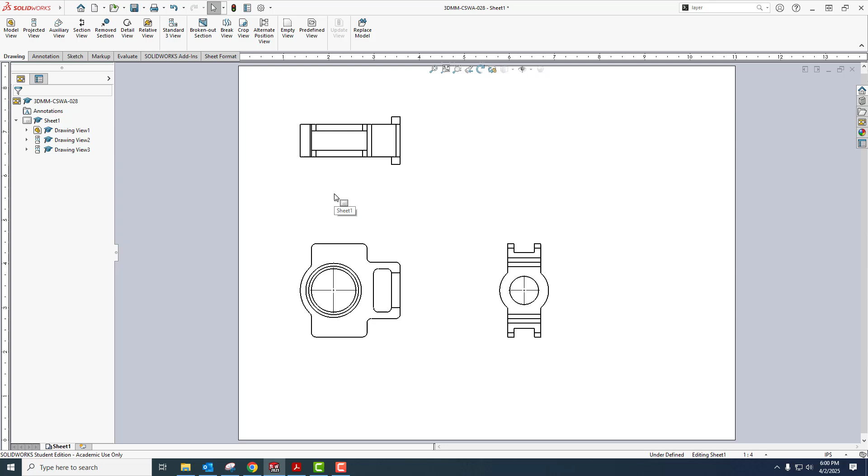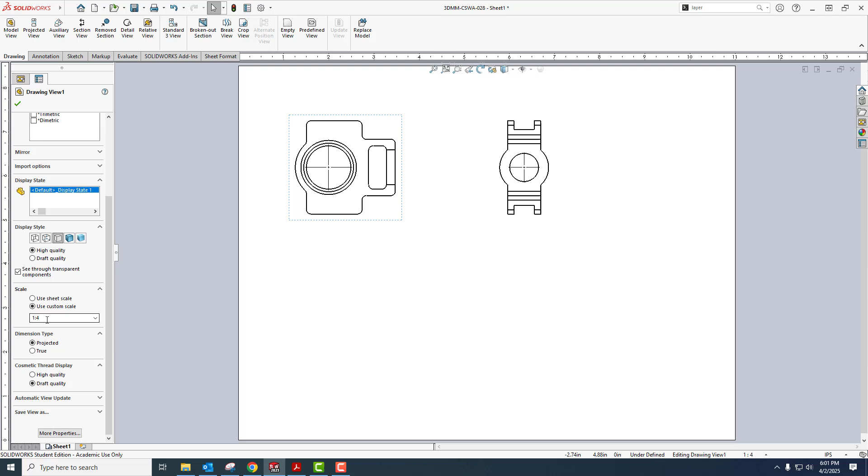So now I'm going to go under the Drawing tab, go to the Standard 3 view, click into Browse to where I have the -28 part located, and I'll say Open. All right, so now what I want to do is I want to delete this view. So I'm going to do that. And I'm going to move these two views up. And I'm going to set the scale of the drawing. So instead of using the sheet scale, I'm going to use custom scale. And I'm just going to type in 1:3 and hit Enter.

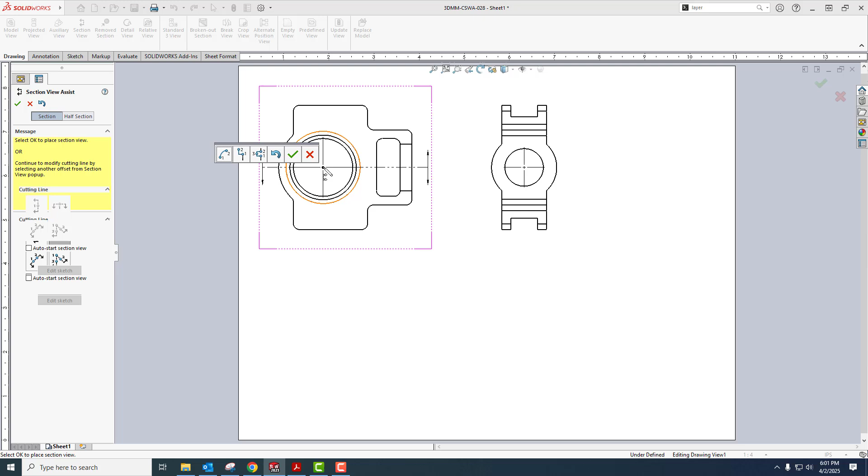Now what I'm going to do is I'm going to come up here under the section view option. I'm going to make sure that I am in the horizontal mode here. This would be vertical. Here's horizontal. I'm going to make sure I snap to the center point. Click the green check mark, drag down, and that's going to create the section view that I'm going to want. I'm going to click into here. Let me just close down that. I'm going to double click under the text under the section view, so I can edit it, and I'm just going to remove the scale 1:3 because I don't want to have a scale necessarily on this drawing.

Next thing we're going to do is I'm going to select here. Under the section view, I'm going to go scale hatch pattern. So it's going to make that a 1:3 scale.

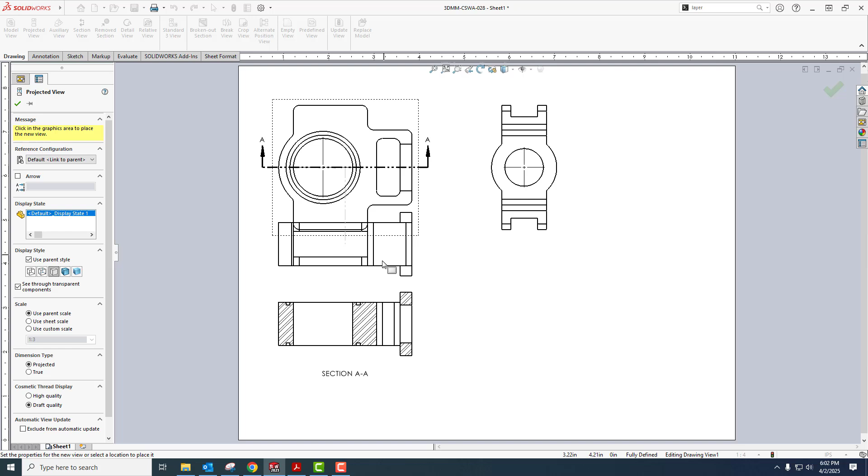And I want to put in an isometric view, so I'll select here. I'll go to my projected view. I'm going to pull up into the upper right hand corner, and once that's there, I'll just move it over here. And I want to change the scale of this one to be 1:6. So instead of using the parent scale, I'll use a custom scale and set that to be 1:6. I'm also going to, under display style, instead of using the parent style, I'm going to utilize shaded. So now I have a nice shaded representation of my part that I'll move over here.

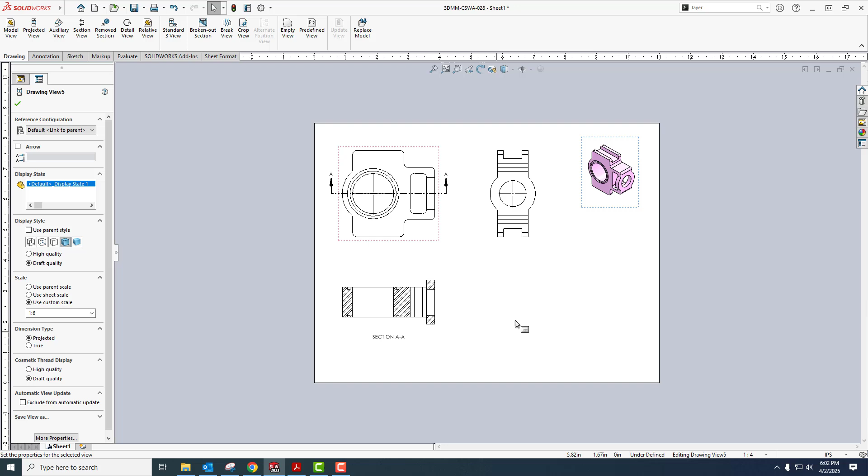Now the next thing I want to do is I want to click on this right hand view. And I'm going to go to tangent edge. So you see these tangent edges that are there due to the fillet. I just want to change them to look a little bit different. So I'm going to go tangent edges with font. So that's going to make them sort of a dotted line. So all the tangent edges in this view will be what they call phantom lines.

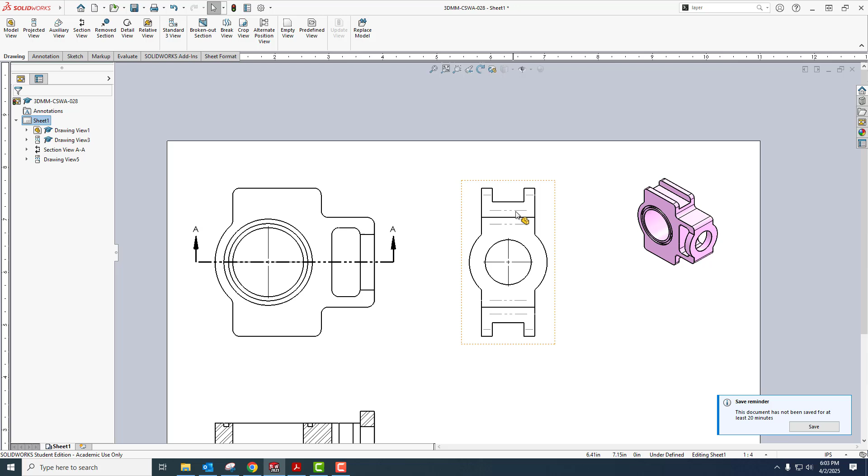And then one more right click, and I'm going to hide the ends of the tangent edges. It's just sort of a graphic way of telling people that these are not edges that you really could dimension to if you were an actual machinist making these parts.

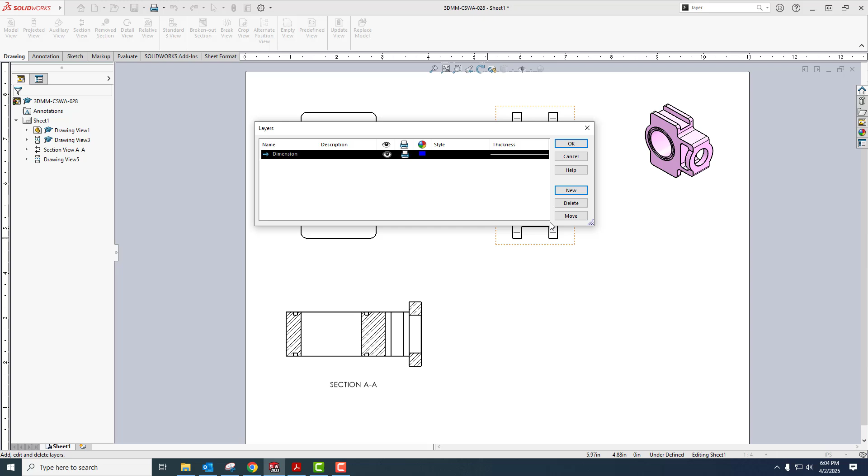Okay, we want to create a dimension layer, so let's do that. So up here again, I'll hit search under layer properties. I'm going to make a new layer, calling it dimension again, and set the color to being blue, and I'll say OK. And when I do this, that actually puts me in the dimension layer. So everything I put on now will be on that layer, acting as to be blue.

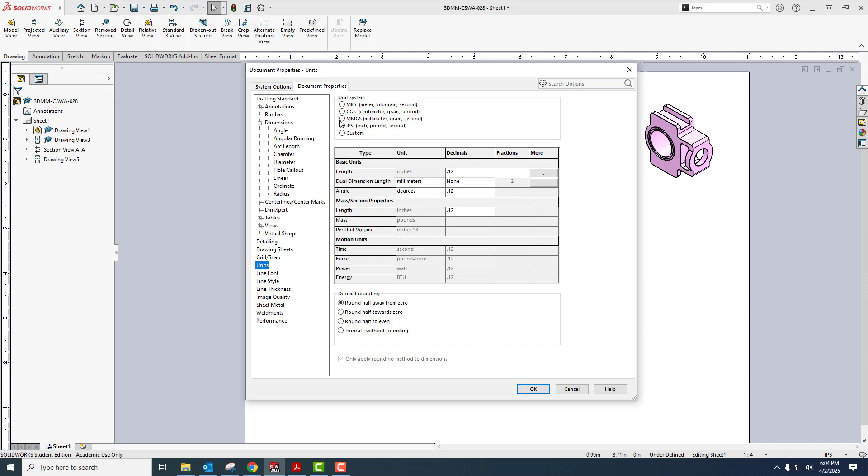I also want to set the units. So go back to my options here, under document properties, under units, I'm going to make us millimeter gram second. And under my dimensions, I'm going to set the primary precision to none.

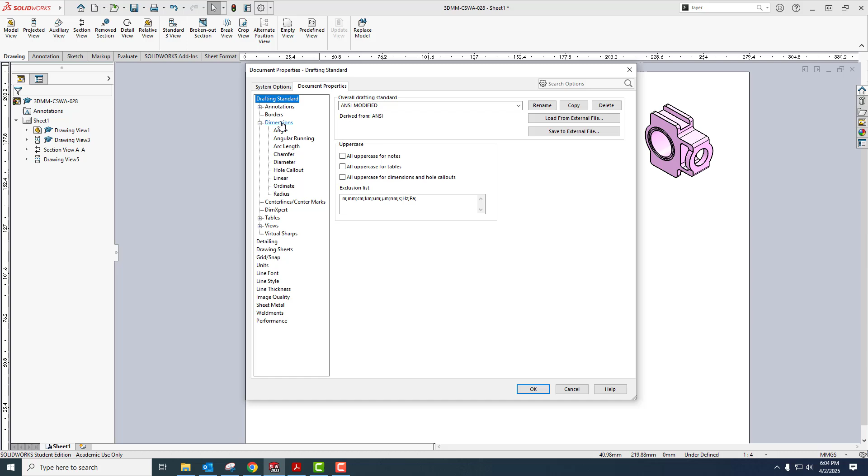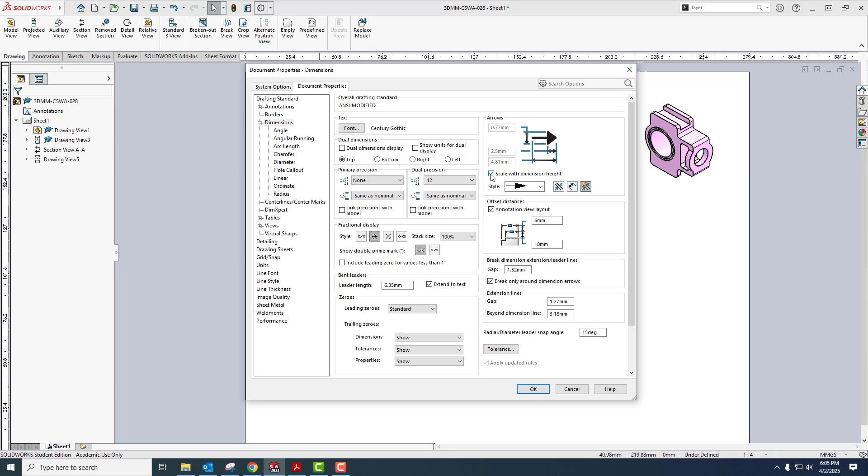Now, I also want to set my dimension text font height. So again, I'll go back into here under document properties, under dimensions, and under the font, I'm going to select the font height. Instead of being 3.175 millimeters, I'm going to make it a little bit smaller, 2.5. And over here, I have the option of scaling all the arrows that are going to be on those dimensions with the dimension height. So I'll do that. And we'll say OK. So this is all pre-work to make sure that my arrows and everything are in the right size.

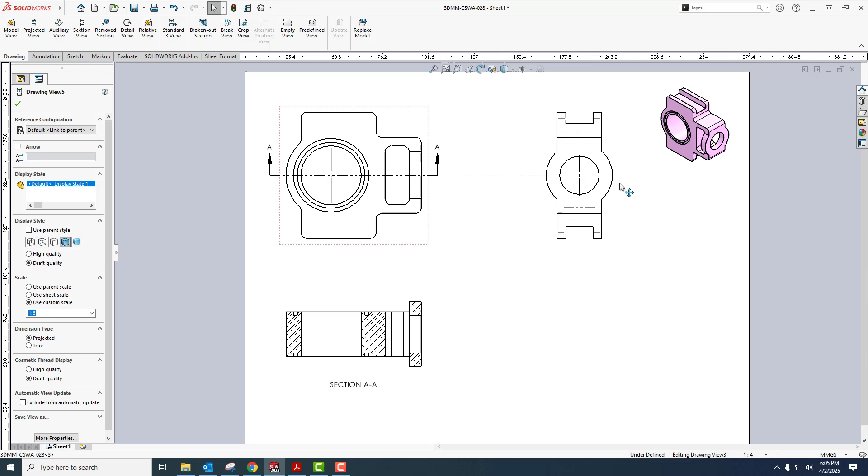And I know this because I've already created this drawing. So what we'll do now is we'll go into the sample that's on the last page of the document for this lab, and we'll go ahead and start putting in the dimensions. What I'm going to do is move this one up a little bit, move this over a little bit, and let's start putting some dimensions in.

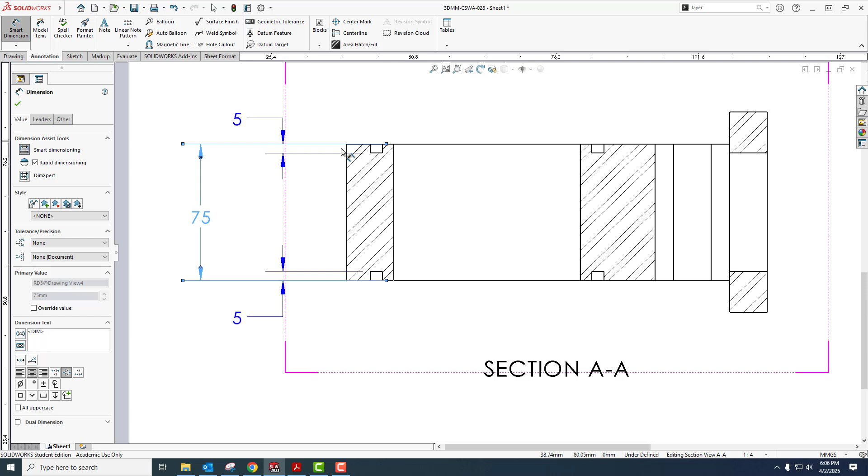So I'm going to click under the annotation tab, go under my smart dimension tool, select here and here, 5 millimeters. And this one will go between these. Now notice what happens here. You see where the dot is? There's no leader line here because I selected the inner line here.

I'm going to do Control Z to get out of that. And I'm actually going to select these lines here. And you'll see that we can still kind of drag them over a little bit. Same thing with this one.

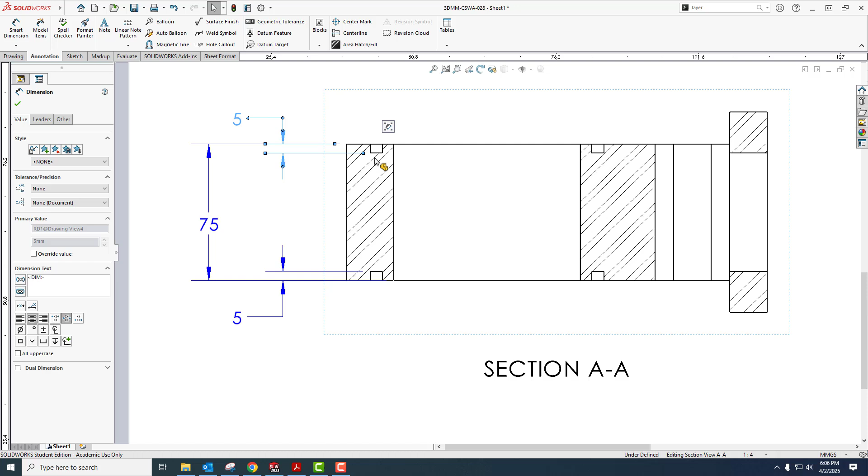All right, and we'll come up here to this view and we'll start with this one. Oh, I have to get into my smart dimension tool. So we're going to make this one 2x. So I'll go over here under the dimension text, go 2x space. And from the center of the circle to here will be 50.

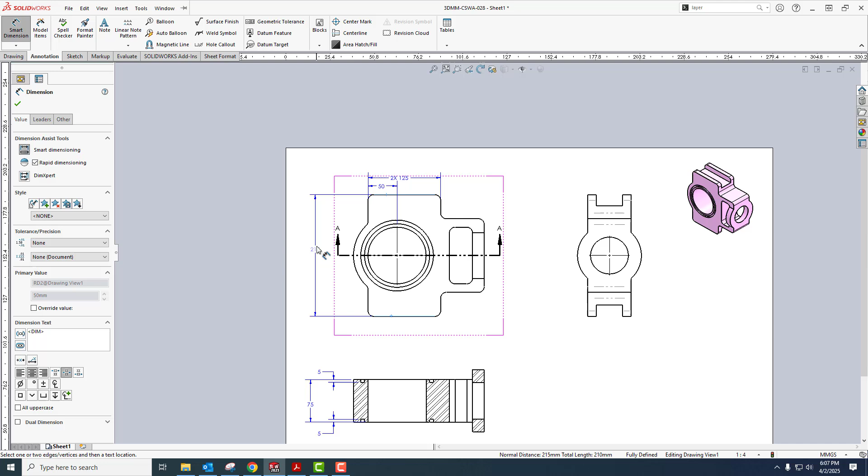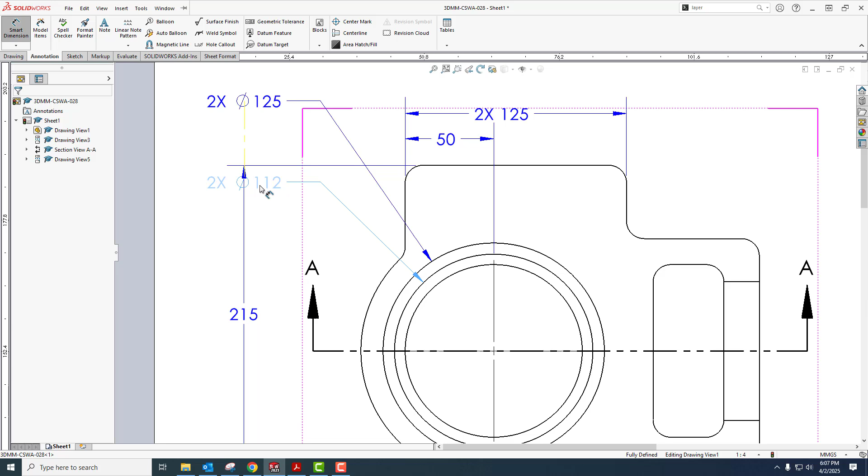The total height will be 215. We come in here to these circles, so these two outer circles, 125 and 112. And since there's one on each side of this part, I'll make sure that we have a 2x on each of those. Let me put them back down where they were. And we'll do a radius here. And then the inner hole diameter is 100.

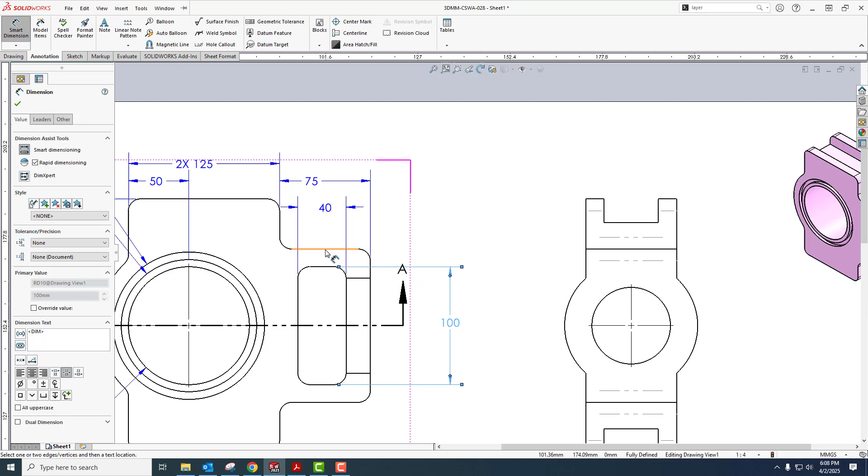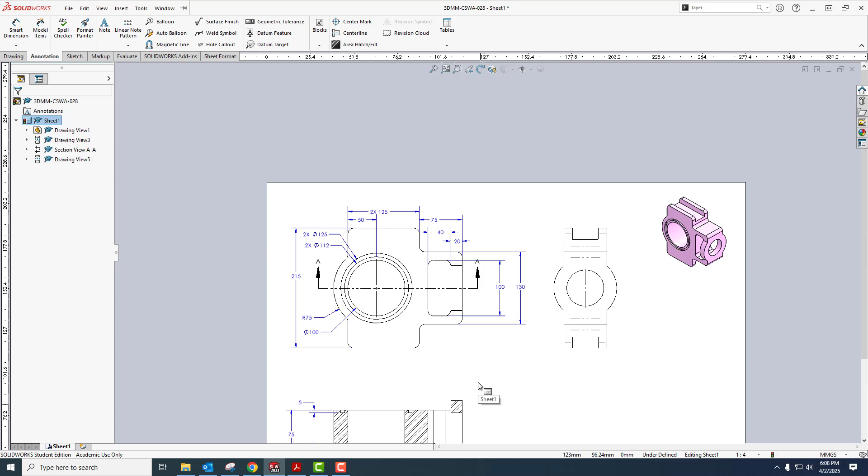Couple more dimensions. Here to here is 75. Here to here gives me 40. And here to here is 100. 130. And 20. Now I can either leave the 20 there or I can pull it to the inside. Either way, it's a bit of a preference as to where you'd want those dimensions to be. And we have a 15 here.

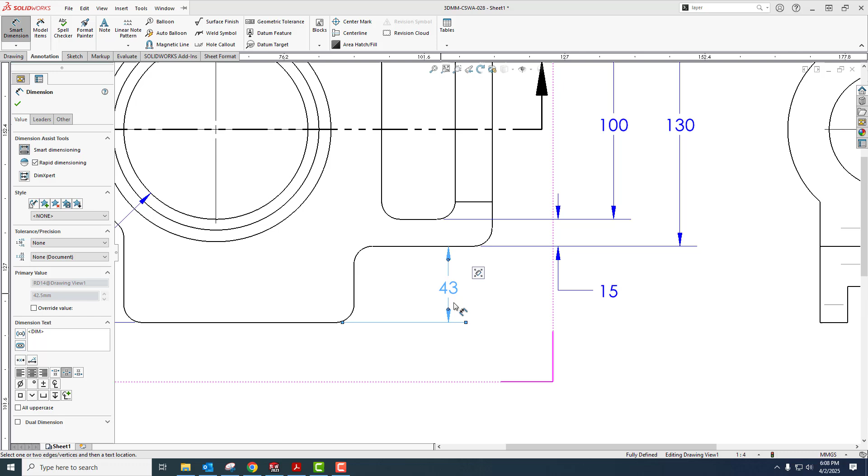Nope, I am out of the dimension tool. Go back into it again. And then we have a dimension here that is listed as 43, but on the drawing it's 42.5. So what I'm going to do here is go over to that dimension under tolerance and precision, under this option here. I'm going to set the decimals to 2 places. So that gives me back my 42.5. So I can individually control the precision of individual dimensions.

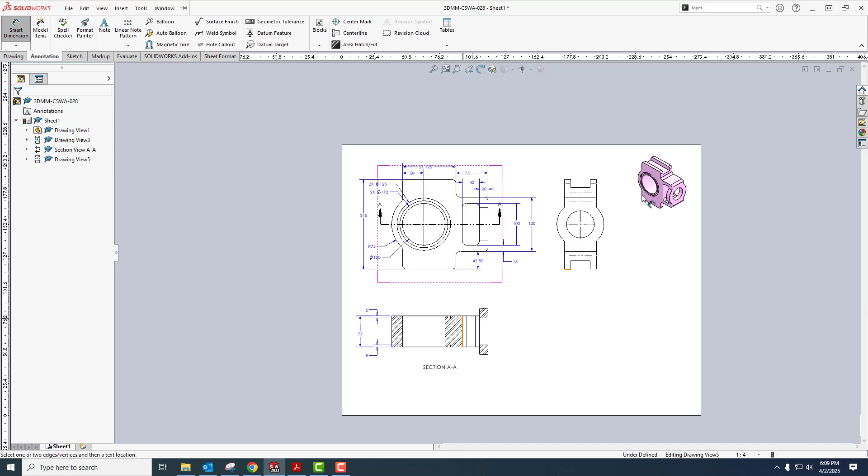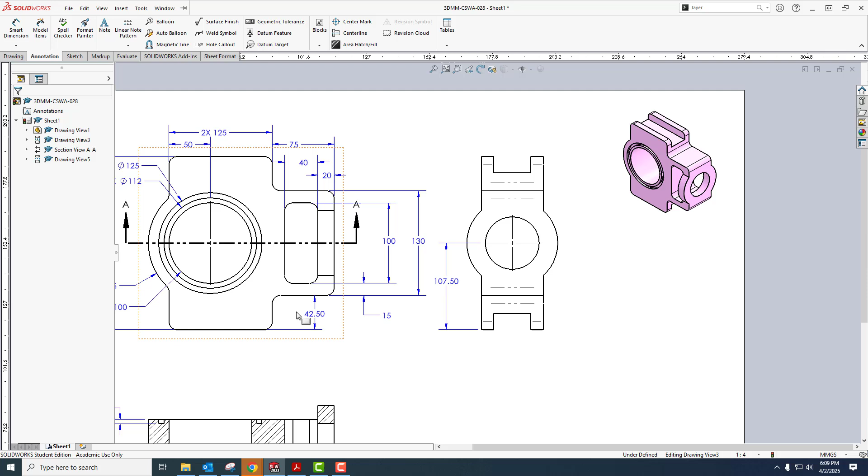So I'll move this over just a little bit. And we're going to go from the center of the circle to the bottom. Again, that's 108. I want to override that dimension to be 107.50. And this dimension here, gotta get back into my smart dimension tool. I want to make that 2x, so I'll come down here to the dimension text, put it in as 2x. Same thing here.

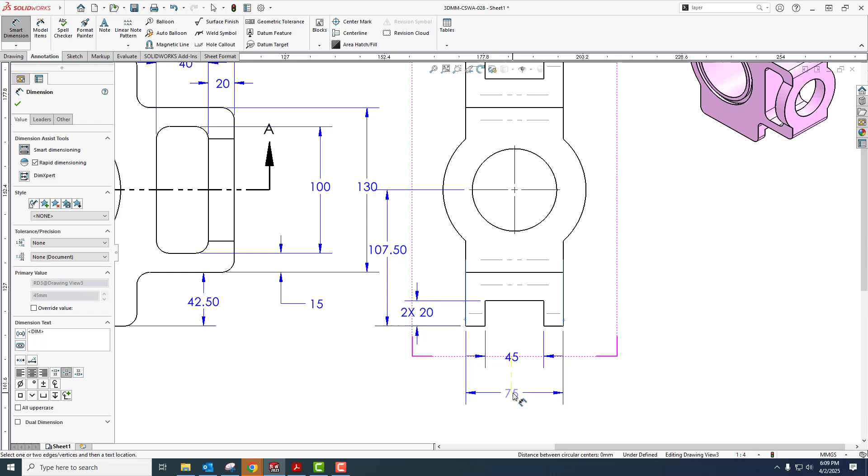Now this dimension that I'm putting in, it's already called out at another location on the drawing over here. So I want to put this in as a reference dimension. So I'm going to come over here under the dimension text and choose the option to add parentheses to that one dimension. And we'll finish up with two other diameters here. So this is diameter 65, and this one will come in as a radius.

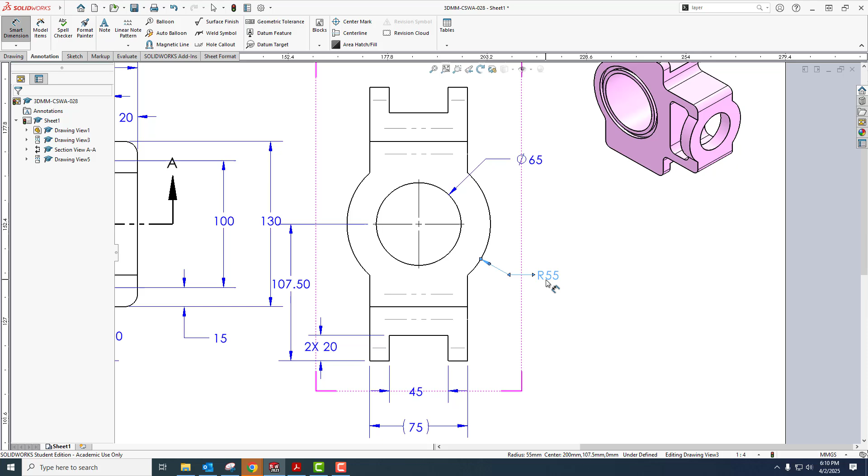And then the last thing we need to do is there's a note that's called out here. Well, first I want to just move my drawings around a little bit. So let me just pull this over a little bit, give it a little bit of room. I can actually adjust these dimensions a little bit if I want to, bring them a little bit closer, put some definition between them.

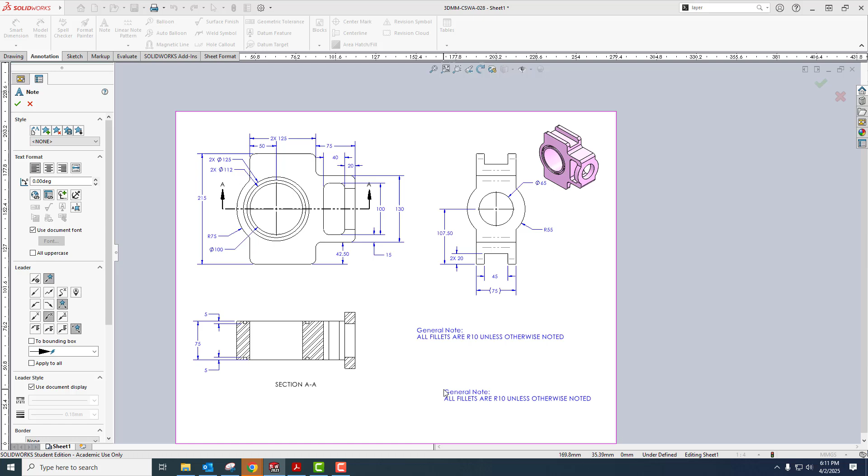And the last thing is there's a note. So I come up here under the annotation toolbar, click under note. I'll drop the note here and put in my information. Put my caps lock on actually. And I'll just click somewhere to say it's done. And you'll note that I could drop it one more time and it actually has an arrow that would come to it. And I can just hit escape to get out of that.

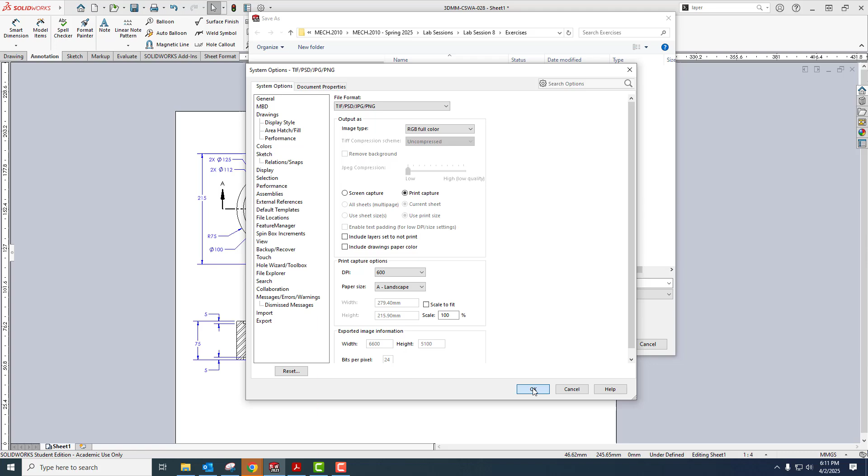And same thing as before now, we will go to save as. Save it as a .png, go under our options. If you're doing this in one session, this should already be set to be print capture 600. We'll click OK. Click save, and I had already created one, so this will be a new creation. All right, and that is how you make the drawing with all of the dimensions required for exercise 2 of Lab 8.